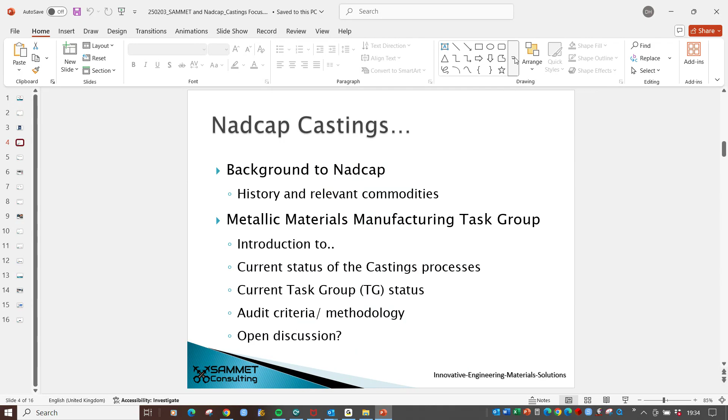So it started out in the 90s, and it started out as original equipment manufacturers, I'm going to talk about them as OEMs, and suppliers to those companies, getting together their process experts, generating audit criteria or checklists, and thereby having an industry best practice criteria, and then using that criteria to maintain or improve standards across aerospace and defence.

So it's now, hang on. So it's now one of the PRI industry managed programs, along with MedAccred and some other programs. So it went from all capitals to just the N. And one of the stated aims continues to be to reduce the audit burden, so to reduce redundant audits, they call them. And those are the audits that every OEM comes to your site and audits the same thing from the same process, maybe just on a different part.

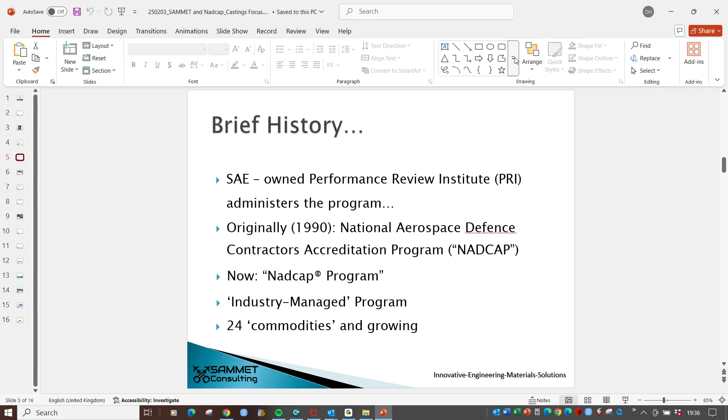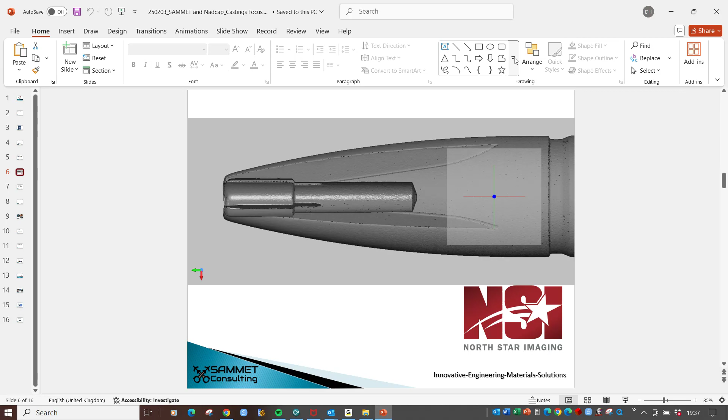This is a selection of the task groups that are maybe pertinent to casting. Heat treatment and NDT are the two longest standing, most established. And castings fits in the metallic materials manufacturing task group. That's also known as MMM for short.

So the OEMs, your customers, will mandate NADCAP by task group, not the actual process itself. So they're going to mandate MMM. They're not going to mandate clearly castings or forging. It's just to add to the confusion. So the decisions with the OEMs, what to mandate, for example, GE mandate heat treatment. Obviously, lots of other OEMs mandate heat treatment as well, but they don't mandate MMM for forging.

And like I was saying, you can access through PRI, who manage the program, the mandates, but they're by task group, so you can't tell. If you look at, let's say, Rolls-Royce, they mandate MMM task group, but it doesn't actually say whether they mandate forgings or castings or powder or what. So you're really relying on your customers to tell you or talk to you about what they're going to do and how they're going to do it.

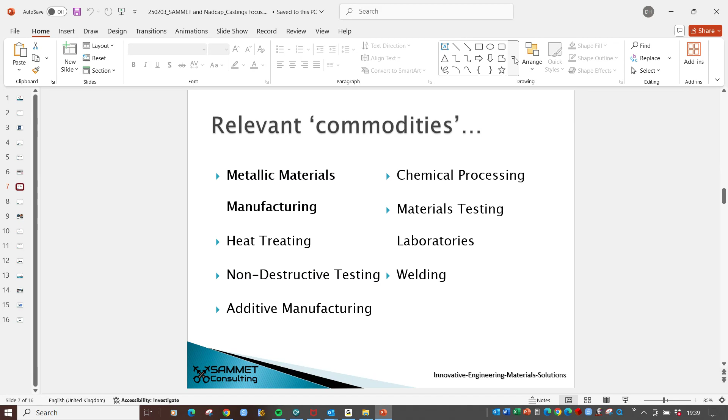So the MMM task group started out in about 2013, aiming to cover forging raw material, castings, and maybe powder. I joined the task group in 2014, spent many hours supporting the forging, writing the forging handbook and the forging criteria. I left my forging role in 2019, so I had to surrender my role on the task group. And you've got the audit criteria, just the identities of the audit criteria in brackets. So off the back of 6 years developing the forging criteria, they moved on in about 2019 to the castings checklists.

Progress is slow. It's a committee writing process, committee approval process, and that approval process is all the voting members. So it's all the OEMs and all the suppliers. The task group needs to follow the PRI rules for quorum. And so they got to the point in 2022 where they published the two casting checklists that are listed. Once they're published, it's up to the OEMs whether they mandate and how they mandate.

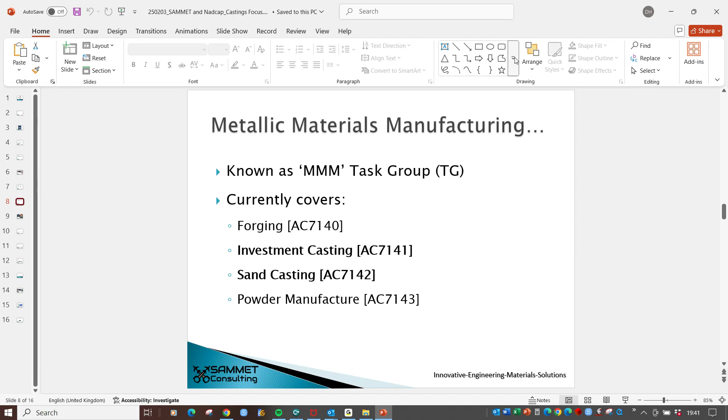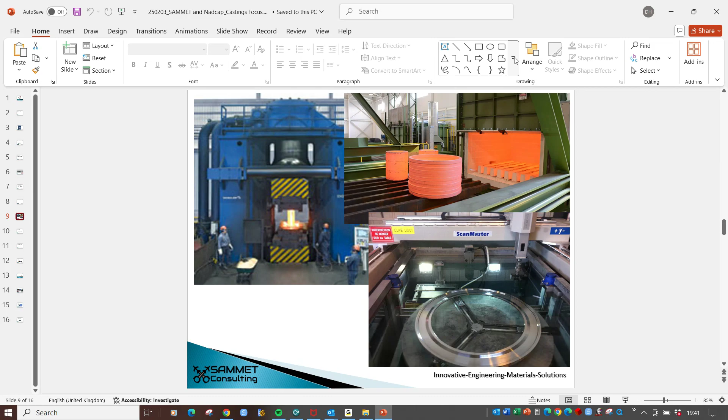So since the June 2024 meeting, there's been no open discussion, and so there's nothing in the minutes to be able to tell whether OEMs are mandating. So like I said, we can only see that they're mandating MMM. We can't see whether they're actually going to mandate castings or forgings or powder. You're left waiting for your customer to talk to you, which I suppose they should.

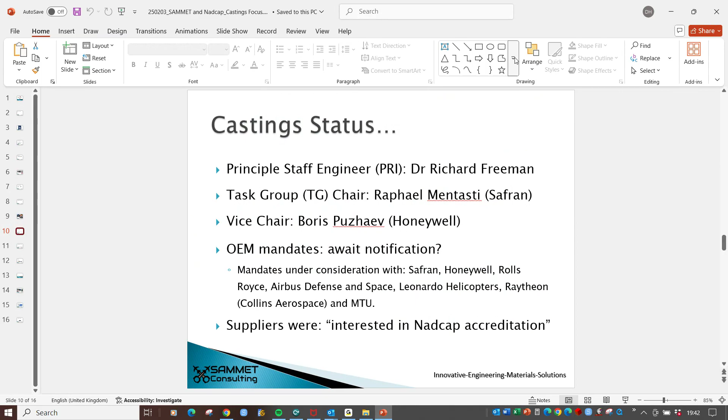As a flavour of participation at the last meeting, which was October 2024, so there's 3 meetings in the year, February, June and October. At the October meeting, there were 12 OEMs. I haven't got here what the split was, but we had 6 forging suppliers, 5 casting suppliers and 6 powder suppliers, just as a flavour.

Some reality checks. So there continues to be not enough participation, so not enough subscriber mandates. And I know I touched on earlier OEMs that are ordering critical parts. They're not that keen to mandate because they're going to be auditing the processes themselves anyway. They can't step away for the critical parts. So that kind of inertia, if you like, is a strong contribution to the lack of task group growth. You've also got that other inertia that I mentioned, where some of the large suppliers are not participating. Saying that, some of them do send members to keep themselves in the loop on the task group.

So currently, the size of the task group voting membership is such that castings checklists, for example, need forging or powder specialists to vote for them to meet the PRI quorum rules. So, I mean, okay, there's some overlap, but you've got that slightly odd situation. But that also means, wouldn't it be better to split the task group into forgings and castings, so you could focus on the processes? But you can't do that because you haven't got enough membership to do that. So that's that.

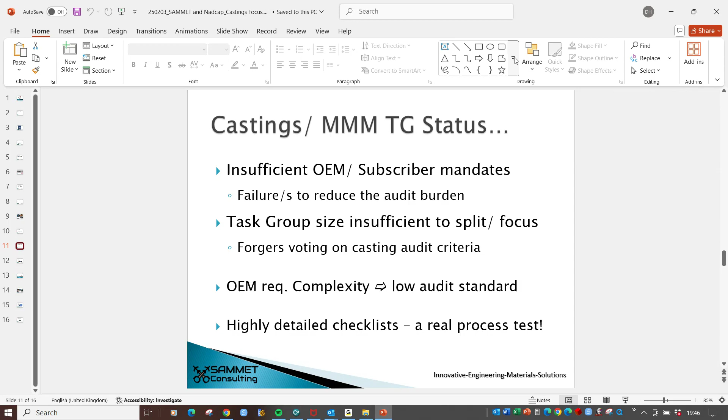So I think I've already said checklists are now referred to as criteria. They've long since lost their duplicated questions on the management system standards, the AS 9100, etc. documents. And if we can set aside the question of whether customers are going to force us to join, we actually have these published checklists, a set of audit criteria documents generated by industry experts from the OEMs and the suppliers, and actually a really good audit resource.

So each document runs through logical process flow, as on the slide, and the auditors are required to witness the live process, so wherever possible, viewing the process in action, and that's a requirement. That's not a nice to have. So all in all, it's well conceived and well set up criteria, and taking that in isolation, it may be worth considering, regardless of whether your customer forces you to do it. Thank you.

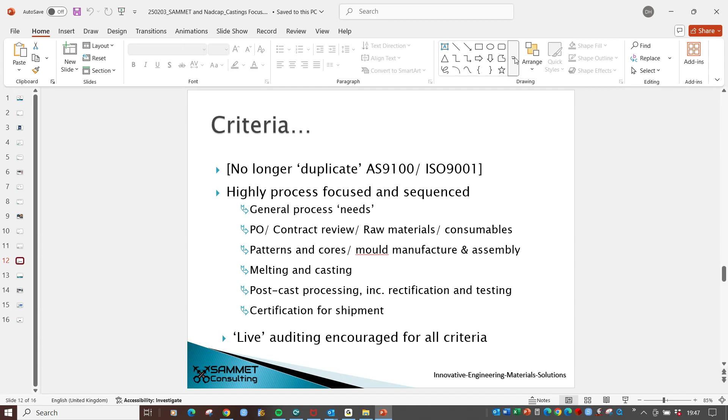So I started out in the late 90s, had the benefit of Professor Campbell's teachings at the University of Birmingham. I worked through magnesium casting and Sellafield plant integrity assessment, got my chartered engineer, and got my fellowship at the Institute in 2021. So my experience has spanned magnesium sand casting, magnesium direct chill casting, plant integrity assessment, so risk-based inspection strategies at Sellafield. That rolled into aerospace forging dies, and then my aerospace experience is around hot forging, so process definition for critical parts, finite element modeling to prove the process before heating metal, and then fixed process definition for a number of OEMs, so Rolls-Royce, Safran, Honeywell, GE, Pratt & Whitney.

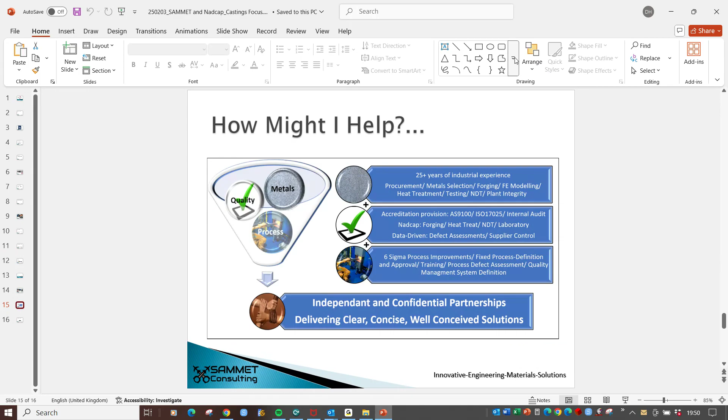So that deep understanding and that resilience is what I think got me into NADCAP auditing, and from the quality systems side, my experience spans metallurgical laboratory, NDT process lines, and management system standards, including 17025 for the labs. And on the NDT side, knowledge and experience in X-ray, ultrasonic, dye pen, surface etch, metallurgical, and magnetic particle. So I want to be your dependable resource, support you in defect investigations, product or process failure, process improvement, your research partner, linking with research institutions, or simply as a trainer or mentor for technical roles. On the quality side, I've got a growing customer base that appreciate my offer of third-party oversight or pre-audit, so doing the work up front to prevent audit findings.